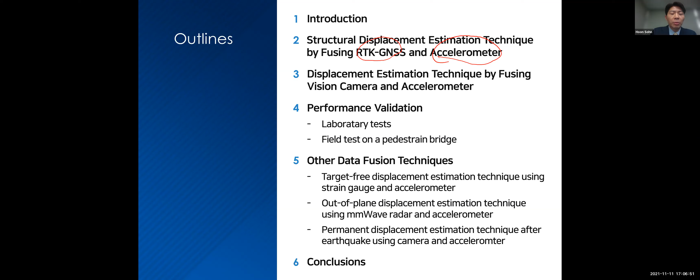First, I will talk about structural displacement estimation technique by combining RTK GNSS—this is too long to pronounce, so I'm just going to call it GPS. We're going to estimate displacement by fusing GPS and acceleration measurements, and then I'll show you another example where we combine vision camera and acceleration for displacement estimation. Then I'll show you some laboratory and field test results, and if I have time, some other data fusion techniques. Then I will conclude my presentation.

So first, why is it important to measure structural displacement? I think structural displacement is very important to understand the global behavior of structures. Displacement can also be used for monitoring, control, and disaster prevention and mitigation.

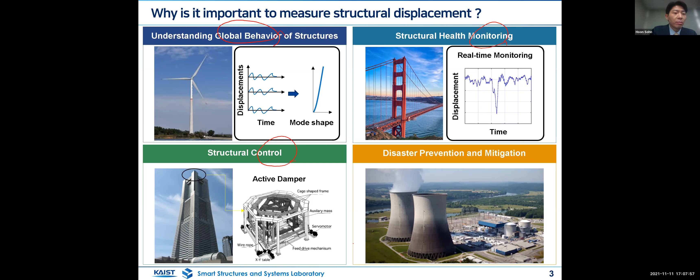Another common approach is to use an accelerometer. In this case, we can estimate displacement by double integration of the acceleration, but the problem is that it doesn't have good accuracy in the low frequency range.

Or people can use a strain gauge, but strain gauge is quite noisy, and it requires some prior knowledge of the mode shapes to convert strain into displacement.

Another common approach is RTK GNSS, where we get signals from satellites. But the problem with GPS is that it doesn't have very good accuracy—the typical accuracy in the vertical direction is in the range of maybe 7 to 10 millimeters.

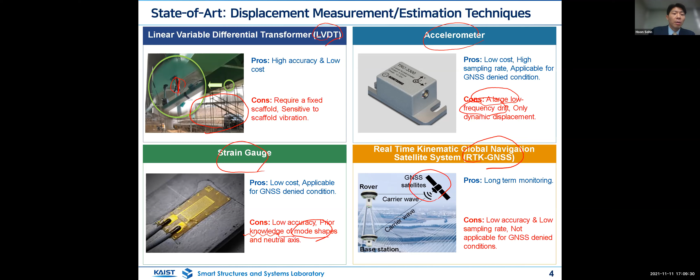These days people are also working on non-contact sensing techniques. One of them is the vision camera, but the problem is that it's sensitive to lighting condition or weather conditions.

Another approach is the laser Doppler vibrometer. This one has very good accuracy and can measure vibration up to very high frequencies, but the problem is that it's very expensive. Sometimes people also try to use radar or LiDAR.

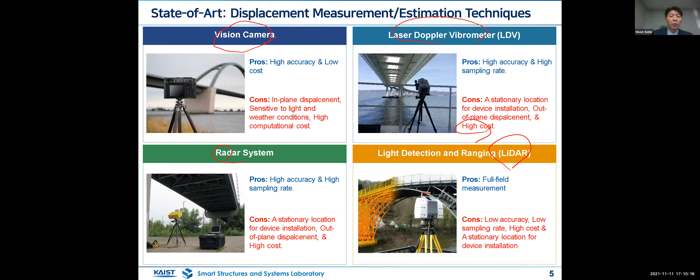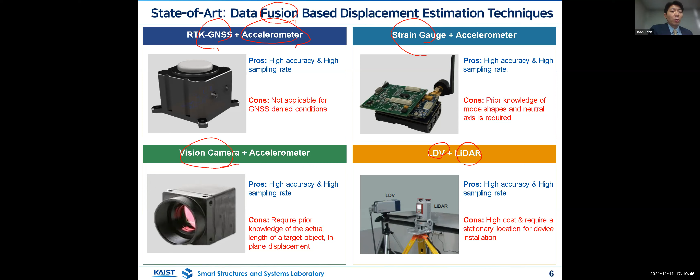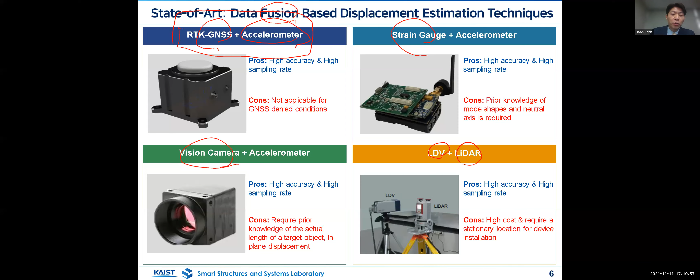And these days, other approaches is that people try to combine sensing data from different sensors. So for example, people try to combine acceleration measurements with GPS or strain gauge or vision camera. Or sometimes people try to combine LDV and LiDAR measurements together. And the first presentation I'm going to show you kind of belongs to this category. So we are combining acceleration and GPS measurements for structural displacement estimation.

So this is our commercial sensor that we developed. So here, inside of the sensor, we have an accelerometer, and then we also have GPS chipsets. So they combine those two data, and then we can estimate displacement, velocity, and acceleration all together in 6 degrees of freedom. And then this data is used for monitoring of several bridges in South Korea right now.

And then here, I want to point out that to use this RTK technology, we need to have a base station at a fixed location. So compared to a conventional GPS, this RTK technology has better accuracy. But to do that, we need to have this base station placed in a fixed location.

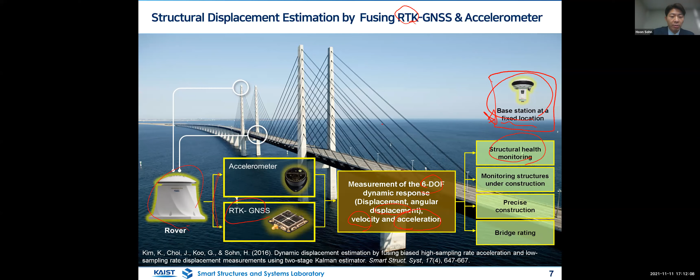So this is an overview of our commercial sensor unit. So inside it has a GPS chipset. So right now it can measure L1 and actually also L2 signals as well. And we are also working with a local company in South Korea to make this force balanced accelerometer. And then also we have a built-in data acquisition system so that we can get data from these sensors simultaneously, and then all the processing can be done inside the sensor unit. And then this is the picture of our actual sensor.

So in terms of data fusion, we are using a two-stage Kalman filter to combine acceleration with high sampling rate and high precision, and GPS signal with low sampling rate and low accuracy. So initially we estimate displacement without considering the bias term in the acceleration. In the second step, we estimate the bias produced by the accelerometer, and by combining them together, we can get a displacement with high sampling rate and also high precision. And again, in addition to displacement, we can get velocity as well as acceleration. That's the advantage.

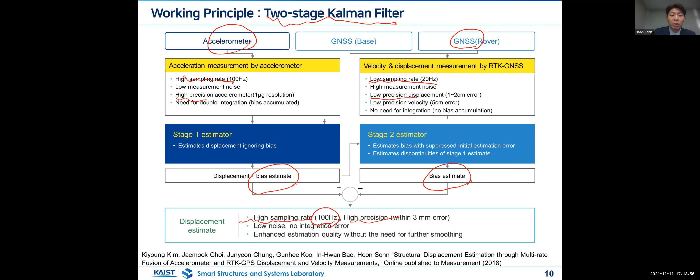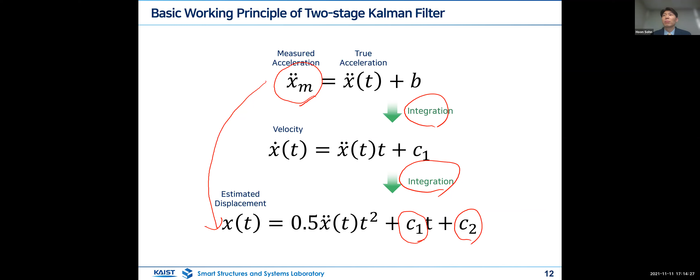So here are some more details, but I'm not going to talk about the details, okay? And here is a nutshell explanation. So this is our measured acceleration. So we can estimate displacement by double integration. So when we do double integration, we are introducing these integration constants. And by using a GPS signal, we are estimating these coefficients. So that's how we estimate the displacement. But in reality, it's more complicated than this. But this is kind of the nutshell explanation.

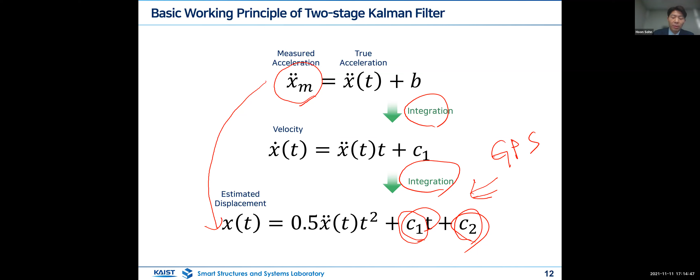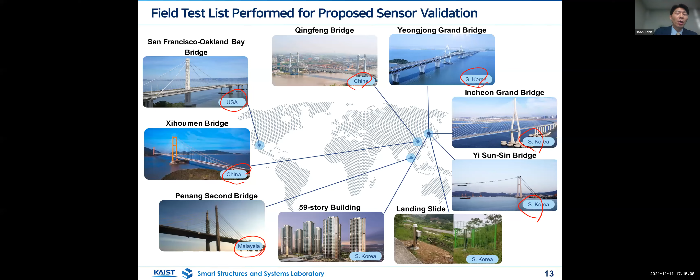And then we tested our sensor for several bridges in South Korea. And also we tested some bridges in China, Malaysia, and also in the United States. And now, as I mentioned to you, this sensor is commercialized, and it is deployed for several structures in South Korea. So here are two representative structures. The first one is Yeongjong Bridge, and the second one is Incheon Bridge.

So if you come to Korea next time, you're going to come to this Incheon Airport. And if you want to go to Seoul, you have to cross this Yeongjong Bridge. And then if you want to go to Daejeon, where KAIST is located, then you have to cross this bridge. So for both of these bridges, our sensors are installed. So next time when you come to Korea, think about our sensors, please, okay? And also our sensor is used for monitoring this high-rise building and also landslide monitoring.

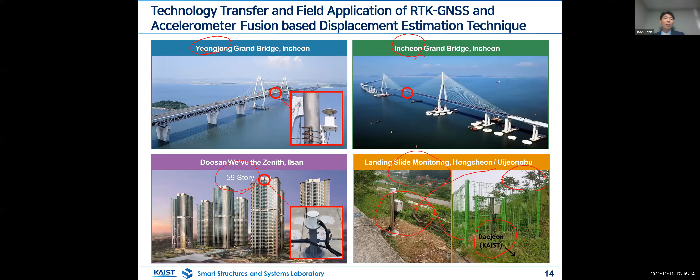So let me show you some data that we obtained from the Bay Bridge in San Francisco. We have done this testing in collaboration with Caltrans in California. So what we have done was we put our sensor at this location. And we put this very expensive LDV at the bottom of the pier, assuming that there's no movement at the pier. And then we send out a laser beam and try to get reflection to measure displacement. But because the angle is too large, we could not get very good reflection. So we put some reflector like this. So when we send out the laser beam, it has some mirror on this surface, so we can get reflection right back.

And then also we put our base station on top of this pier, assuming that the movement is negligible. Again, remember, the base station has to be placed at a fixed location. So that was the assumption.

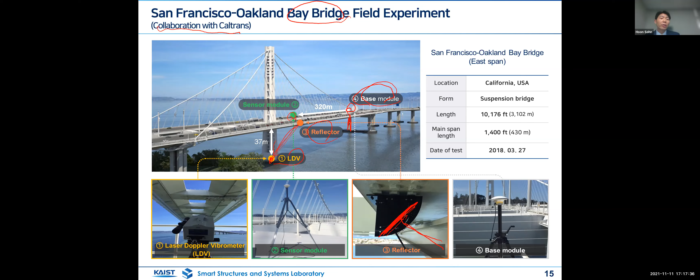So overall, when we tested different bridges, Yeongjong Bridge, San Francisco Bay Bridge, etc., the displacement estimation errors were less than 2 or 3 millimeters. So I think that the overall estimation error for vertical displacement was quite good.

So now let me introduce some problems with GPS and discuss how we can address them. So first, in metropolitan cities like here, satellite signals are going to create multiple paths. So it doesn't go straight to the sensor. There are going to be a lot of reflections. So that's going to deteriorate the displacement estimation.

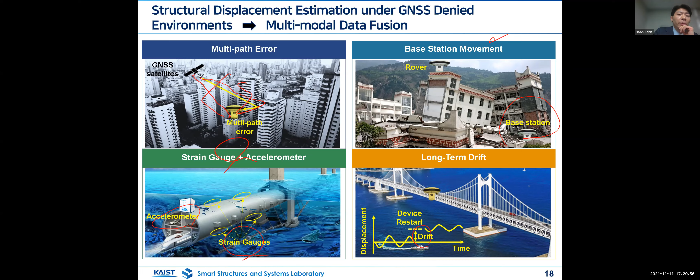So these problems can be addressed by fusing acceleration data with some other sensor data, such as a vision camera. Then how about underwater applications? In this case, we don't have access to satellite signals. So I'm going to show you later on that we can use accelerometers and strain gauges for displacement estimation. So this presentation is mainly focusing on displacement estimation under GPS-denied environments.

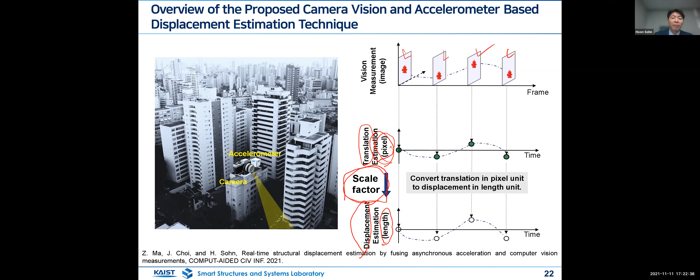So first, let me show you how the scaling factor is conventionally estimated. A lot of times we assume that the physical size of the target is known. If I know the physical size of the target and the corresponding number of pixels, then we can compute the scaling factor very easily. But in reality, in many cases, the target is going to be located far away from the sensor, and it's going to be difficult to know the physical size of the target.

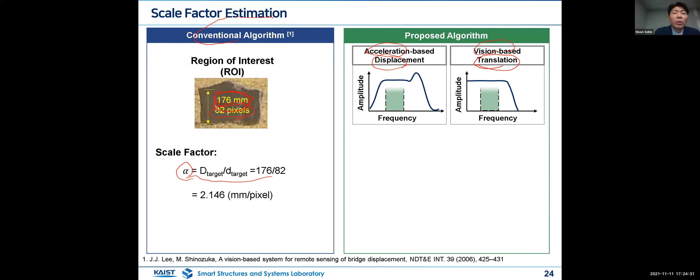So in our proposed technique, what we do is we initially estimate displacement from acceleration through double integration, and also from the vision camera, we estimate translation in the pixel unit. And when we compare them, we look at the responses only for some specific frequency band. The reason is, if you look at the acceleration response in the low frequency range, they are not reliable.

And also, if you look at the vision image in very high frequency range, they are not reliable either. So we are choosing some frequency band to compare the displacement from acceleration and translation from vision camera. So we can look at their relationship, and most likely they're going to have this linear relationship. And this slope represents the scaling factor. So in this way, we can automatically estimate the scaling factor without knowing the physical size of the target.

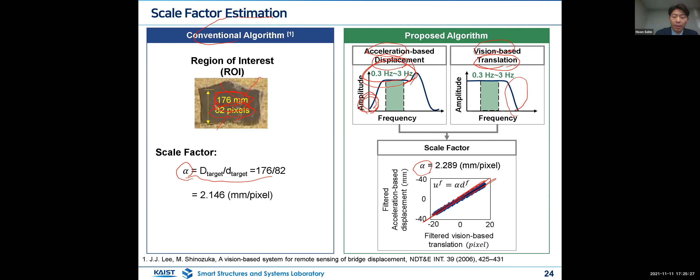Okay. So once we know the scaling factor, now I can trace the relative movement of these targets, and then we can get initial displacement from vision camera, and then combine this initial displacement with acceleration measurement so that we can improve the accuracy of the displacement. Okay. So now, next, let me show you how we can trace the movement of this target.

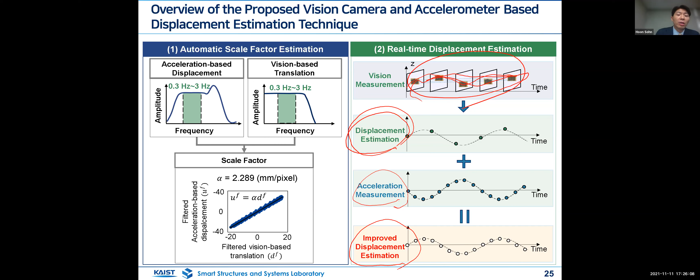So in the conventional approach, we define this region of interest in the first frame, okay? And then the target inside this ROI is continuously traced in subsequent images. Okay, but as you can see here, when we have large displacement, sometimes the target can be outside of this ROI. And this can be a problem.

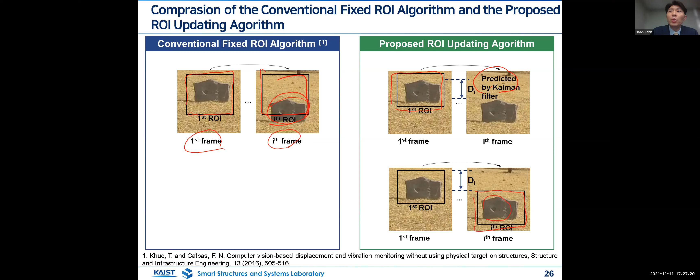Okay, so what we do is, we initially define ROI, and using Kalman filter, we can predict the movement. And based on the prediction, we can move our ROI. Okay, so in this way, we can make sure that the target is going to be inside of the ROI all the time, even when we have a large movement.

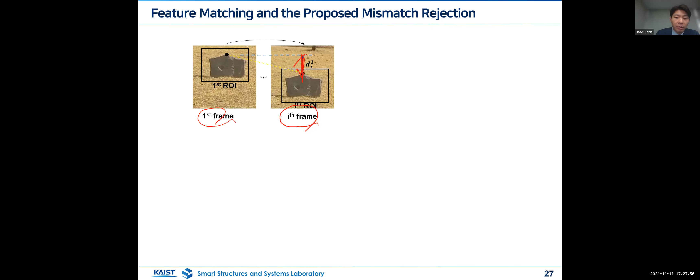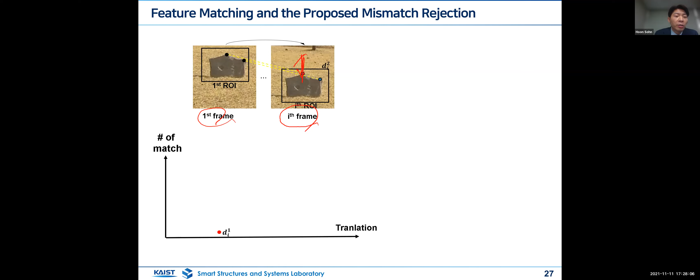Okay, so for translation estimation between the first frame and the current frame, we first extract features from the target. And then we compute a translation for each feature. And by the way, in this example, we are estimating only the vertical translation. Then we can get a vertical translation from one feature and repeat this procedure for several features. And then we can get the distribution of this translation.

And also using Kalman filter, we can predict this interval. So this is corresponding to maybe 6 sigma. And sometimes we might have some translation which is outside of this interval. So this is corresponding to some mismatch. Mismatch means that this feature is supposed to match to this point, but sometimes we can have some mismatch, right?

So we can automatically reject these mismatch points, and then we can compute the average translation value. And this average translation becomes the movement, the translation of the target. And then we adjust the ROI according to this average translation value.

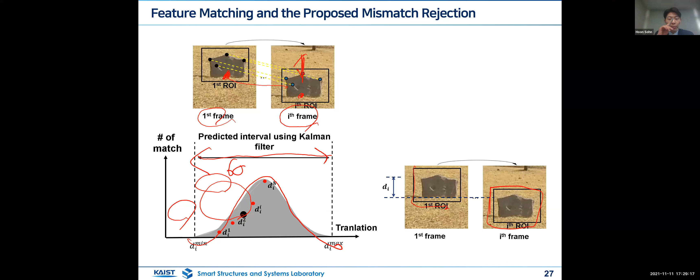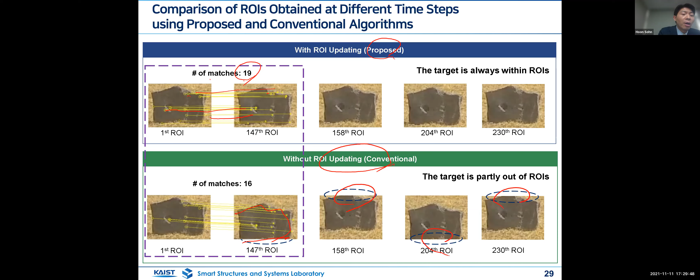Okay, so here's an example. Using our proposed approach, we can see that we can have pretty good matches of these features. So here the number of matches was 19, but without the proposed technique, we can see that sometimes the target can be outside of the ROI. So we have less number of feature matchings, so we have less accuracy.

Okay. So once we do our feature matching, we can compute the average translation for the target. And I showed you how we can compute the scaling factor. And then we can easily compute the displacement at some point. And then we repeat this procedure between the first frame and the next frame, and then we can compute displacement at the next frame. Okay.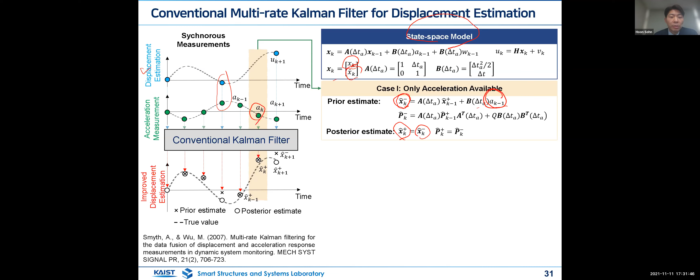And second, when we have acceleration and displacement from vision camera simultaneously, as you can see here, our state vector is estimated using the displacement at current time point, and then this one is obtained from acceleration. Okay.

But in reality, in many cases, there will be some offset between those two measurements, so they are not going to be synchronous. So in our approach, we assume that acceleration and displacement have different sampling rates, but also they are not synchronized. Okay? Under this assumption, we have three different cases for state vector estimation.

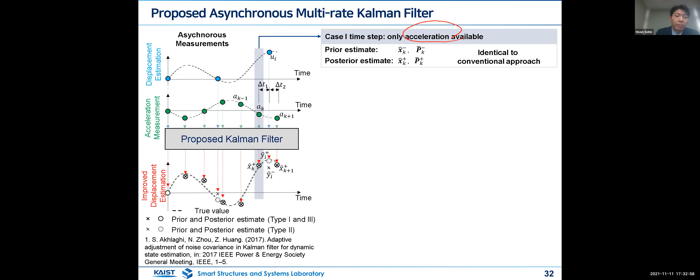So first, when we have only acceleration, this is equal to the previous case. Okay. In case 2, when we have only displacement, like here. So in this case, we don't estimate displacement. Here, we only estimate the gain matrix.

And in case 3, when we have acceleration, and displacement can be anywhere between this interval, like here, displacement is estimated using the displacement right here, and then using acceleration, and then displacement, and also we use this Kalman gain that we estimated previously. Here I want to point out that our technique can handle asynchronous multi-rate data.

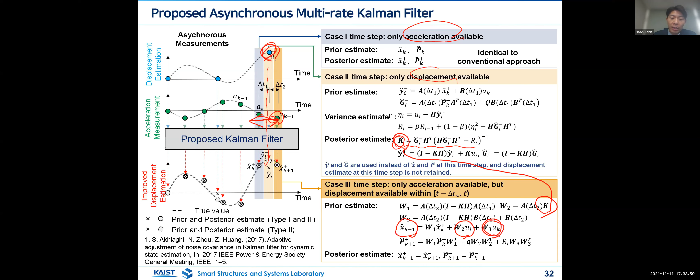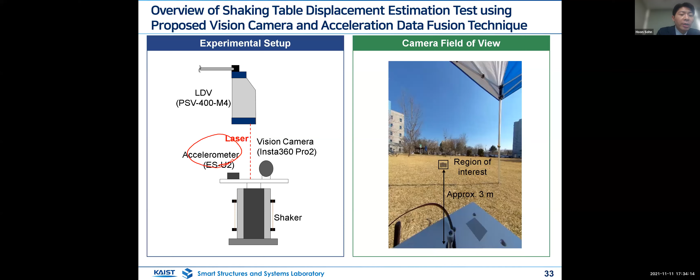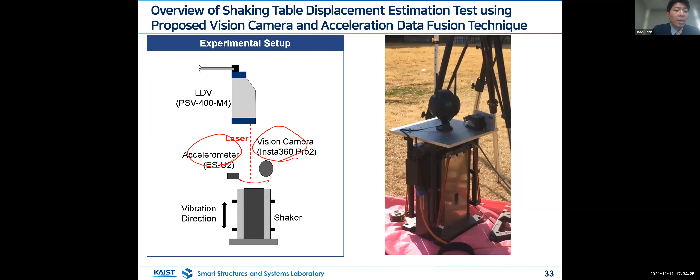So let me show you some data. This is the test setup that I showed you previously. Again, we have our accelerometer and the vision camera on top of the shaking table, and this one is moving up and down. So we put 3 different types of excitations to the shaking table: a sinusoidal excitation, a sweeping signal, and then we actually recorded real bridge vibration and put that as input to the shaking table.

So this is the displacement estimated using only a vision camera, and this is the displacement obtained by our proposed approach. Here we can see that we can improve the accuracy about 20%. Overall, the error was less than 1 millimeter.

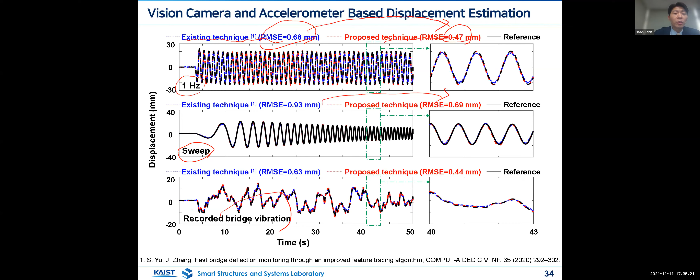Next, we repeated a similar test, but here the distance between the sensor and natural target was about 51 meters. This is our natural target, and we put the sensor on top of this 4-story structure, which was placed on top of our office building. The shaker was again producing horizontal movement.

To use a conventional approach, people have to go to the window and measure the physical size of the window so that we can estimate this scaling factor. But in our case, we don't need to know the physical size of the window. All we have to do is combine data from acceleration and vision camera, and then we can automatically estimate the scaling factor.

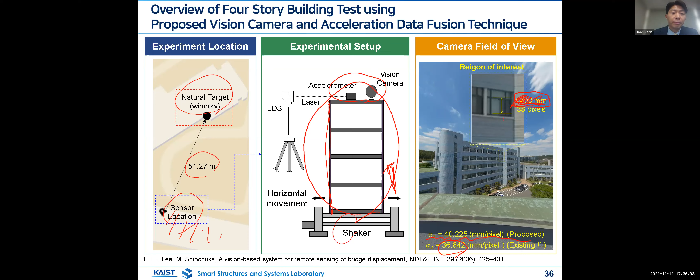So this is our actual setup, and we also use this laser sensor to get the reference displacement. So again, we put a sine wave and then a sweeping signal, and also we are producing a pseudo-static displacement. In all cases, the error was less than maybe 4 millimeters.

Oh, I'm sorry, less than 3 millimeters. And again, compared to a vision system, we were able to improve the accuracy. Here, compared to the previous example, the error level increased slightly due to the increased distance to the natural target.

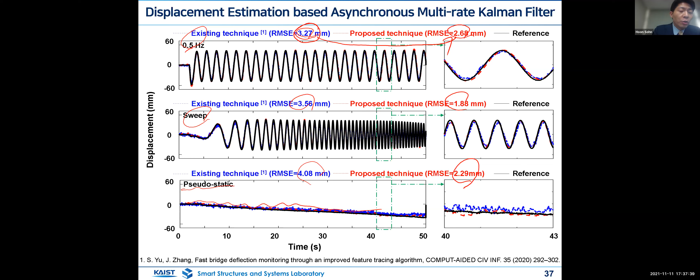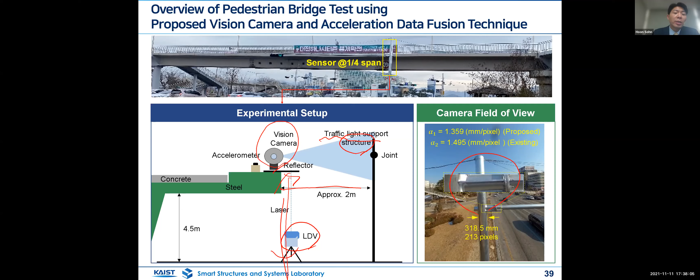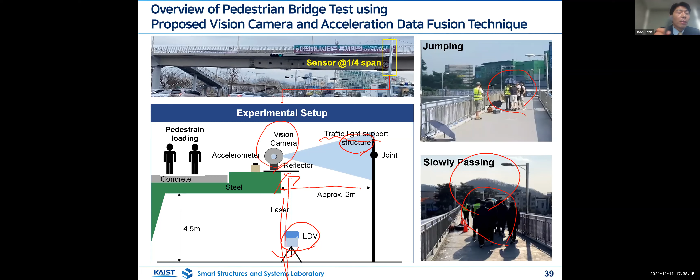And this is the result using a vision camera, and we can see that we were able to improve the accuracy quite a bit.

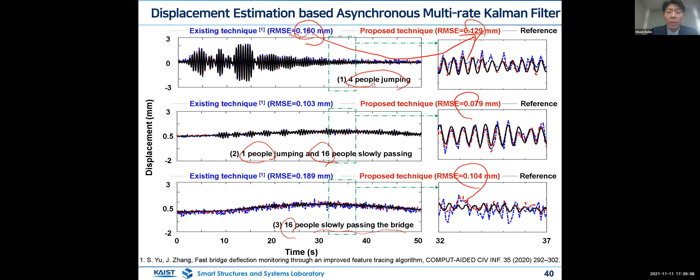Also, we can use this vision and acceleration fusion system for estimating permanent displacement after an earthquake. Remember that we cannot use RTK technology since the base station is going to move during the earthquake, right? So what we do is first we take vision images before and after the earthquake.

And then we perform feature matching, like this, and then find feature groups where the variation of displacement is very small, like these locations. This location indicates locations where the structure did not move that much.

So what I mean by that is, due to the earthquake, you can see that some of these features are moving quite a bit, but the base did not move that much, right? And then we compute the mean value of these feature groups of displacement to estimate the permanent displacement.

So let me summarize the uniqueness of the proposed acceleration and vision-based displacement estimation technique. First, we were able to estimate a scale factor automatically by combining acceleration and vision measurements. Also, we were able to update the ROI automatically so that we can trace large displacement. We also proposed an automated mismatch rejection algorithm to improve our feature matching procedure, and our technique can be used for fusing asynchronous multi-rate data.

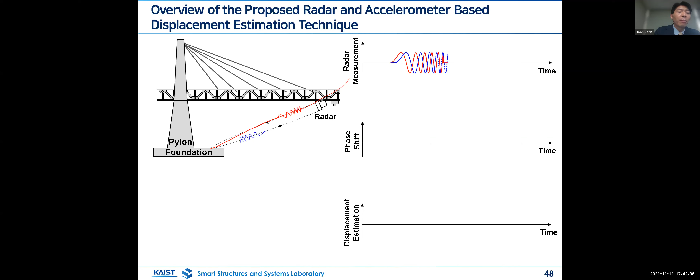Let me first explain the basic working principle. First, we send out incident waves to some target point, and then we measure reflections. By comparing those two signals, we can compute the phase. But the problem is that there can be multiple solutions because of the ambiguity of these sinusoidal signals—they are apart by 2 pi.

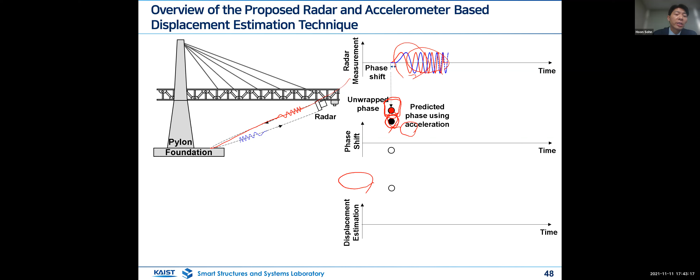So what we can do is use acceleration to predict the phase shift, even though it may not be exact, and then we choose the phase which is closest to the prediction obtained by the accelerometer. Using a scaling factor, we can convert this phase shift to displacement. Initially we convert the phase to displacement along the line of sight direction, and then subsequently convert it to the displacement in the actual vibration direction.

Next, we repeat this procedure and estimate displacement at the next time point. But as you can see, this time interval is going to be large, so the sampling rate is going to be limited. Once we estimate this initial displacement, we can combine it with acceleration, just like the previous approaches.

So we have done similar testing, just like before. In this case, again, we put this 4-story structure on top of our building. We have our accelerometer and then millimeter wave radar, and this time the structure is moving in the horizontal direction. So this is our configuration.

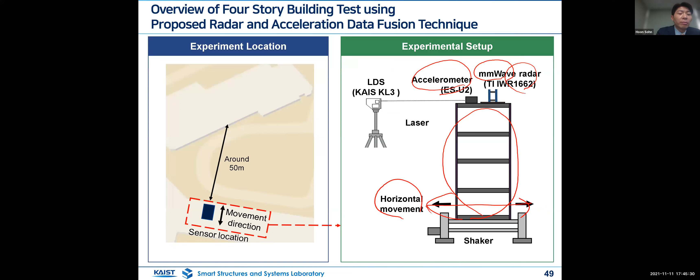So now, like before, we put in a sinusoidal excitation. The red one is the proposed approach, and the blue one is the conventional radar technology. Here we can see there's some drift right here. What happened was, because of some ambiguity, instead of finding the correct phase shift, sometimes they picked the wrong phase shift information. That's what happened, and then we can see some drift, even for this sweeping signal.

For this bridge vibration it was okay, but as we get more and more data, we can see that the error is accumulated. Using the proposed technique, the estimation error was less than 1 millimeter. So this was pretty good.

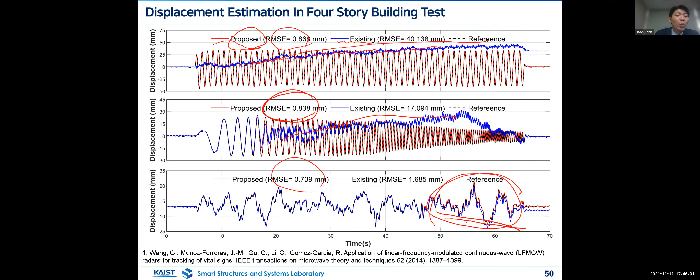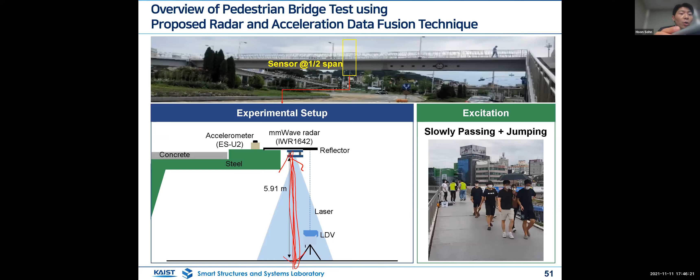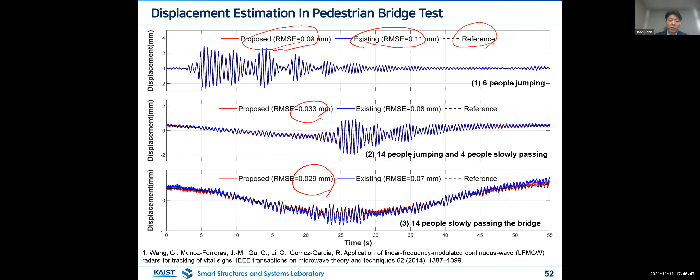So next, how about underwater applications? In this case, we cannot use GPS, vision, or even radar. Our department at KAIST has a large-scale project funded by the National Research Foundation of Korea for developing key enabling technologies for the design, construction, and maintenance of submerged floating tunnels. As part of this project, I'm developing a displacement estimation technique for underwater applications.

In this case, what we do is combine strain gauge measurements with acceleration. The key is how to estimate initial displacement from the strain gauge. Once we get the initial estimation of displacement, the rest is pretty much the same as the previous approaches.

The basic concept is that if I know the mode shape for the displacement, and this is the second derivative of the mode shape, and if I can measure strain at two locations across the cross section of the tunnel, then we can estimate displacement. Of course, in many cases we will not know the exact mode shapes. I'm not going to explain the details, but we also have a procedure to introduce a compensation factor to account for the discrepancy between the actual mode shapes and the assumed mode shapes.

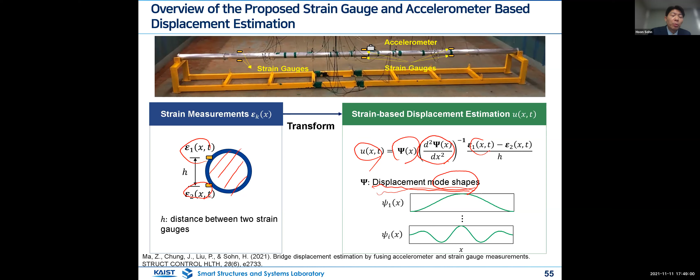So then, to test our idea, we have done several tests.

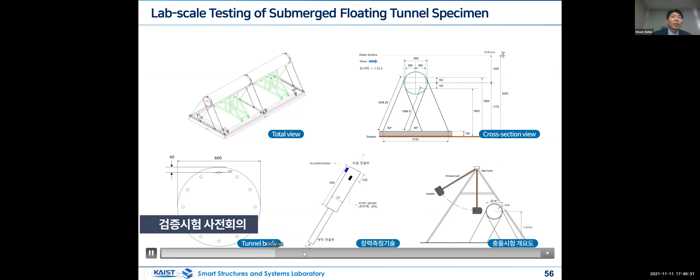So we have done the actual testing. We made several specimens.

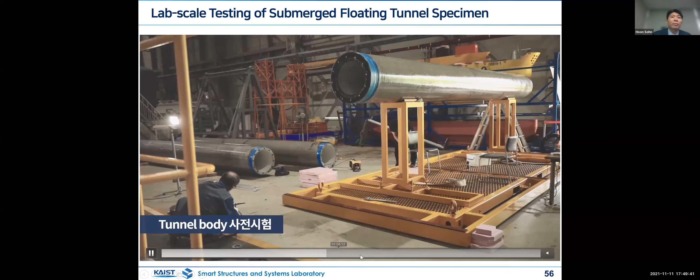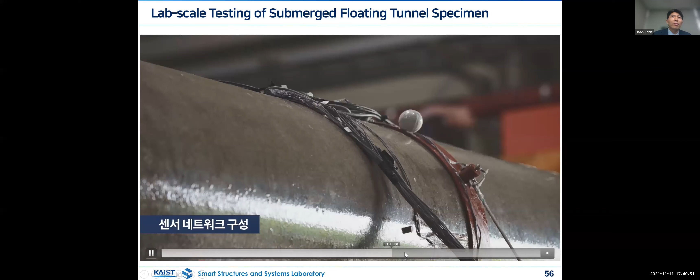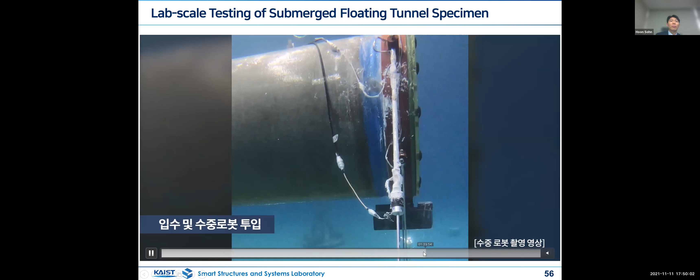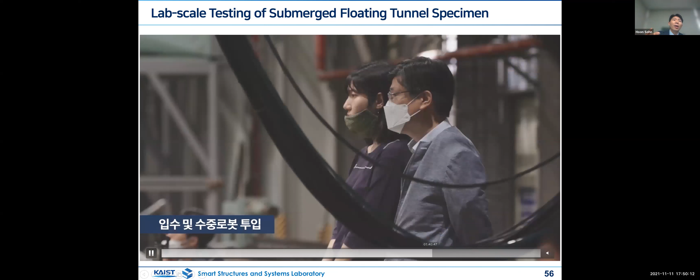And we actually put them on the water, okay? And then we created some waves, and then we can see the vibration of the tunnel like this. So we do testing until the failure of these tendons, okay?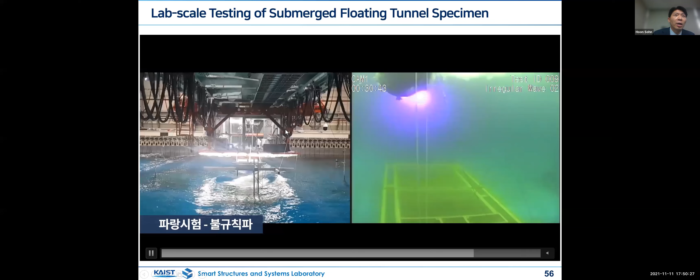So here is another test specimen. So this is our tube here. And then we put strain gauges at 6 different locations. And at each cross section, we put 3 strain gauges.

We need those 2 to measure our vertical deflection, and we need those 2 to measure our horizontal deflection. And also we put accelerometers at these 5 locations.

And then you can see that there's some metal sticking out at these locations. And we put some markers, and then we put a camera somewhere here so that we can get a reference displacement, because under the water, we cannot measure displacement precisely, right?

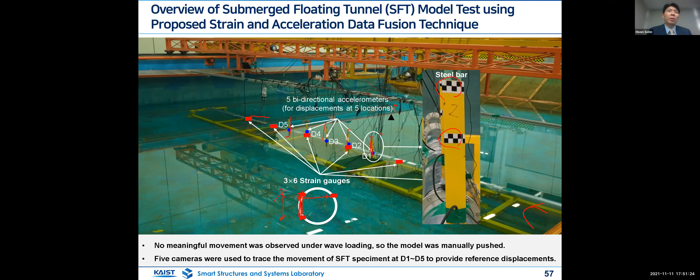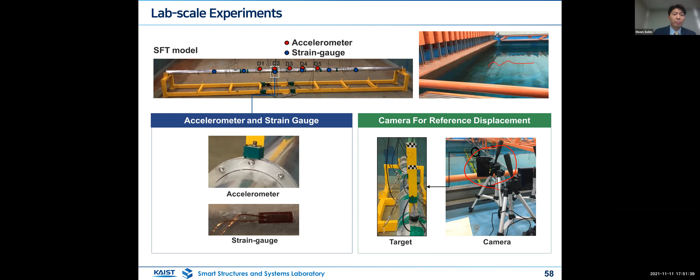So again, we produce waves, and then using this camera, we can get the reference displacement. This is the horizontal displacement obtained by strain gauge, and this is the one obtained by our proposed approach.

So we can see that we can reduce the error significantly. And then this is the vertical deflection from strain gauge and using our proposed technique. Again, we were able to reduce error maybe around 50%. And we can see that there are some waves coming in and going out, and coming in again.

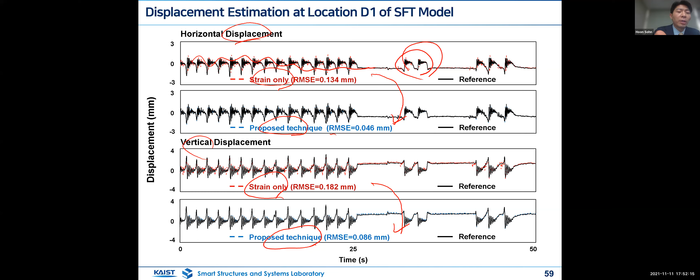So this is the last page. So if you have been sleeping during my presentation, it's time to wake up. So in this presentation, we presented 4

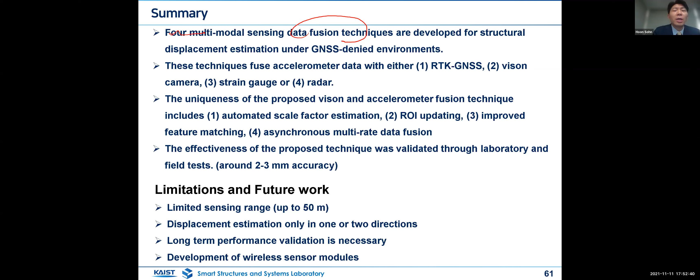multimodal data fusion techniques to estimate structural displacement, especially focusing on GPS denied environments. So what we do is we always try to use acceleration measurements and then try to combine acceleration measurements with either GPS, vision camera, strain gauge, or radar.

And for the vision and acceleration fusion technique, the uniqueness is automated scaling factor estimation, and also automated ROI updating. And also we improved our feature matching algorithm. And then our technique can be used for asynchronous multi-rate data fusion.

And the effectiveness of the proposed technique was validated through laboratory and field tests, and in many cases, the error was less than 2 or 3 millimeters. Well, I have to mention that we have done only a preliminary test, so there are many limitations.

First, we have done testing only for a short distance, maybe only up to 50 meters. And then displacement was estimated mainly in 1 or 2 directions. Eventually, we want to estimate displacement in 3 directions.

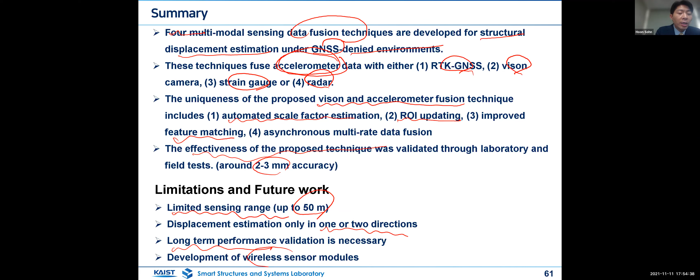Also, personally, the advantage of using these data fusion techniques instead of using GPS is that these sensors consume much less power than GPS, so it's going to be more attractive for wireless sensor developments. So that's what we try to do in the future.

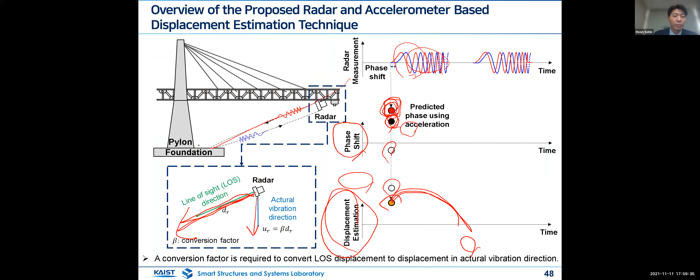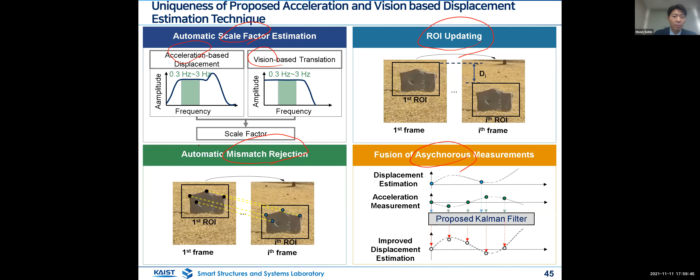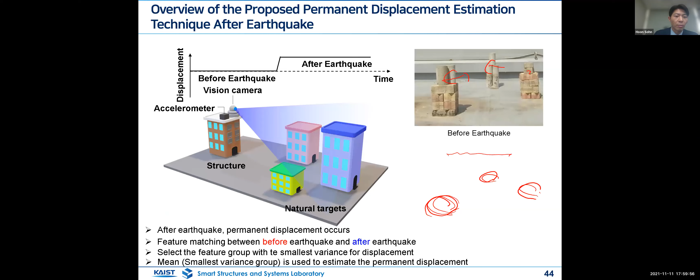So this is the problem when you have too many animations. Yeah, and I think she is referring to where is... yeah.

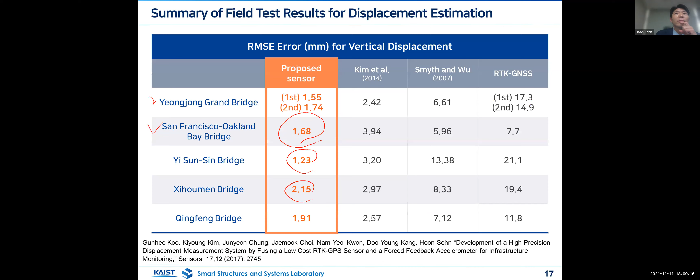So some of these noise terms, right? For acceleration, before we start the vibration of the structure, we can estimate the noise level relatively well, so for acceleration it's okay. But for the vision camera, we don't have a very good estimation of the noise level. So most likely we have to rely on the acceleration measurement, and then we have to assume relatively large noise for the camera at the beginning. As we continuously update the Kalman filter, we are also updating the noise covariance matrix, and eventually the noise is going to converge. That's how we address the noise issue.

So there's another question. Okay, any other questions?

Good, okay, thank you. Any other questions? Thank you, so feel free to contact me by email anytime, okay?